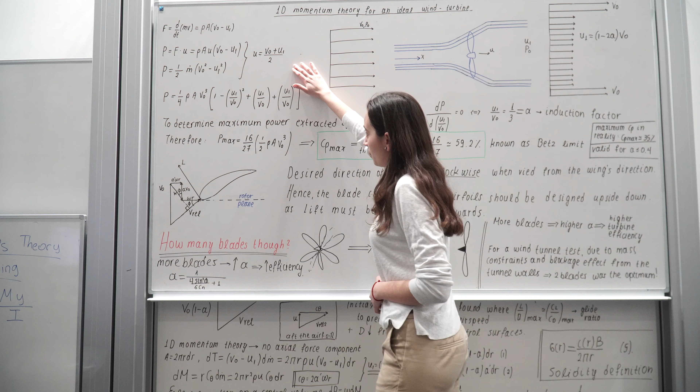A wind turbine extracts mechanical energy from the kinetic energy of the wind. This disc, which represents a wind turbine, generates lift and also slows down the wind due to the pressure drop behind it. If we consider the momentum balance and these equations, combining these two, we get average velocity, and hence substituting back in, we get the power.

When we differentiate this equation, we get that the velocity ratio behind relative to the velocity ratio in the front is equal to 1/3, and if we substitute that in the power equations, we get that the maximum power coefficient that we can generate is equal to 59.2%, which is known as the Betz limit.

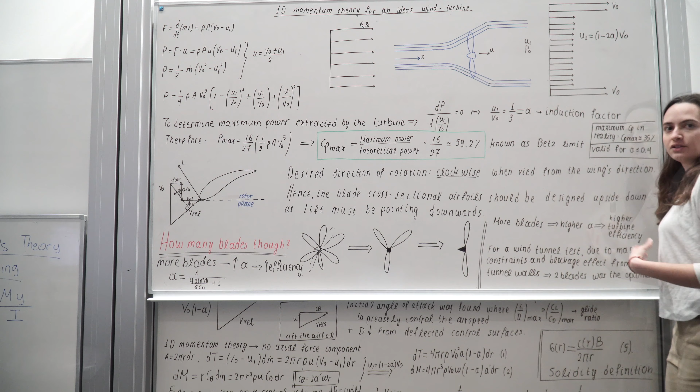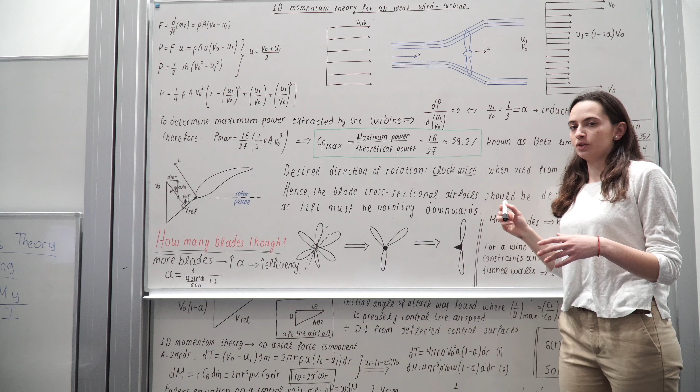But in reality, due to wake losses and friction, there can't be more than 35% of CP max. These equations are valid if the induction factor is less than 0.4, but we considered and fixed that when the case was more than 0.4.

In a normal airfoil, the lift is generated upwards. If the airfoil was kept like that, the wind turbine would rotate anti-clockwise instead of clockwise. Hence, we had to reverse that upside down to determine the spinning direction we would like.

More wind turbine blades give maximum power and efficiency. However, many blades closely spaced may introduce turbulent regions of air and mixing when rotating at high speeds. After a three-bladed design, the efficiency doesn't increase that much. For our application, due to the mass constraint and to minimize the blockage effect, we decided to go for a two-bladed design. So the chord and pitch angles were calculated using the Schmid distribution.

As you can see here, the relative velocity changes as the radius of the blade changes and is maximum near the tip. Thus, we had to introduce a twist angle, except for the pitch angle that's already introduced.

So the Prandtl's tip loss factor corrects our calculations for the wake turbulence that is being generated behind the wind turbine. So we added also this in our blade element momentum theory code, and we also introduced the Glauert corrections, which concerns an induction factor larger than 0.4.

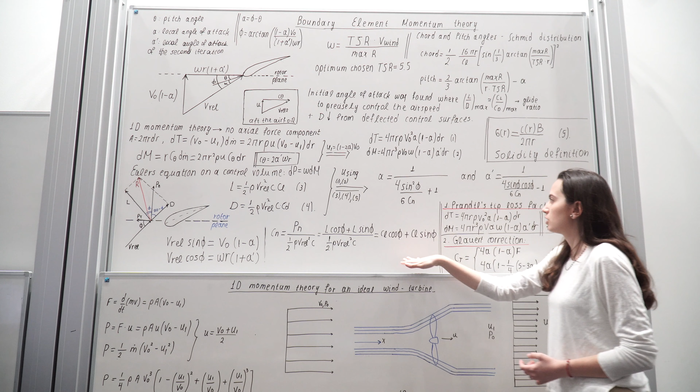And using these and the definition of lift and drag, we concluded on the axial induction factors.

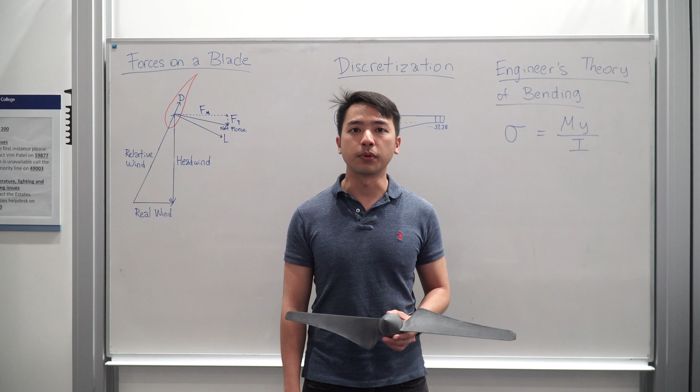Now that we have optimized the blade aerodynamically, we need to make sure that structurally it is able to withstand the loads that the blade will experience during testing. The two main loads we are concerned with are aerodynamic loads, which will cause the blade to bend in this direction, as well as centrifugal forces.

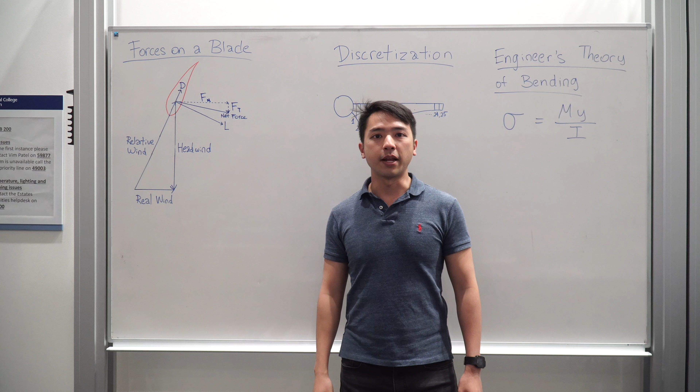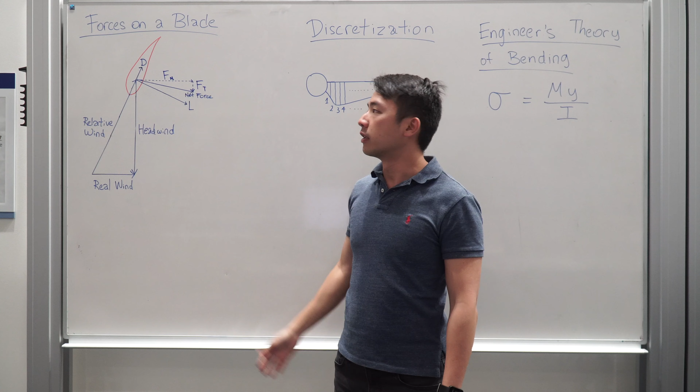As the blade spins, the forces act radially. First, we look at aerodynamic forces. From this diagram, we can see that the resultant force acting on the blade can be decomposed into a tangential force as well as a normal force. The tangential force is what causes the blade to spin, and what we are concerned with is the normal force, which causes bending stresses.

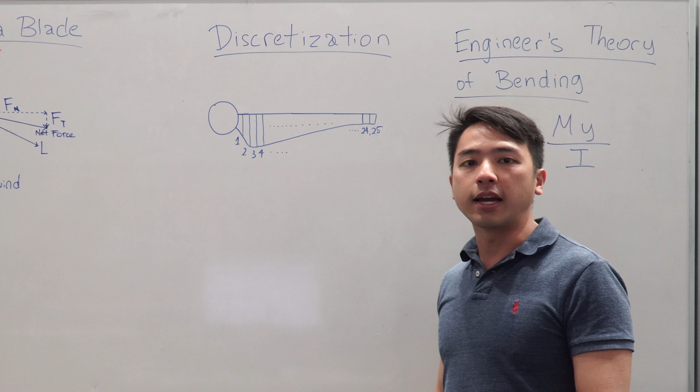To calculate these stresses, we simplify the problem by dividing the blade into 25 discretized sections, and assume that aerodynamic forces are discrete loads at each section. The second force we look at is centrifugal force. Again, we simplify the problem by discretizing the blade into 25 sections. The centrifugal force on each section is labelled dFc and is calculated with this formula.

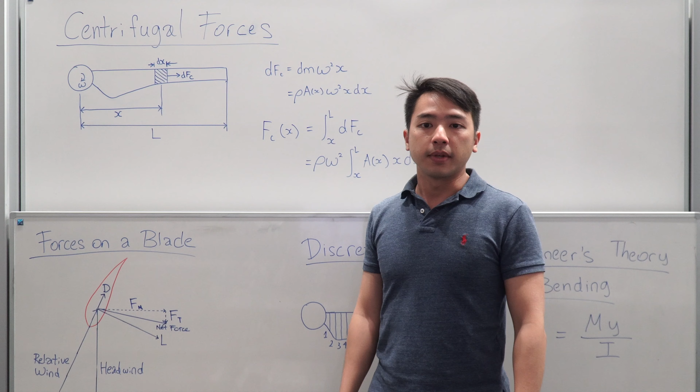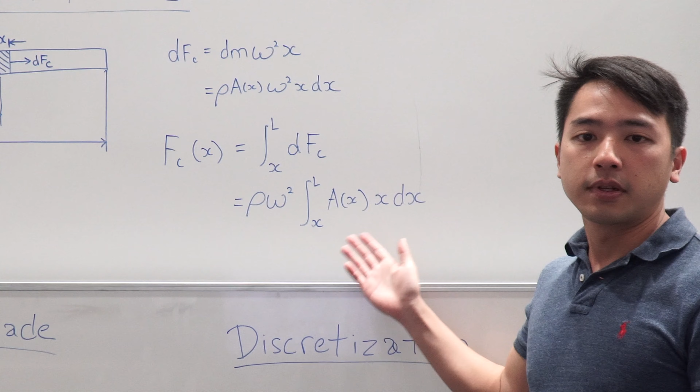To obtain the total centrifugal force acting on each section, we perform this integration. This force is then divided by the cross-sectional area to obtain the stress acting at each section. MATLAB was used to calculate and plot the resulting stress distribution across the entire blade, as shown.

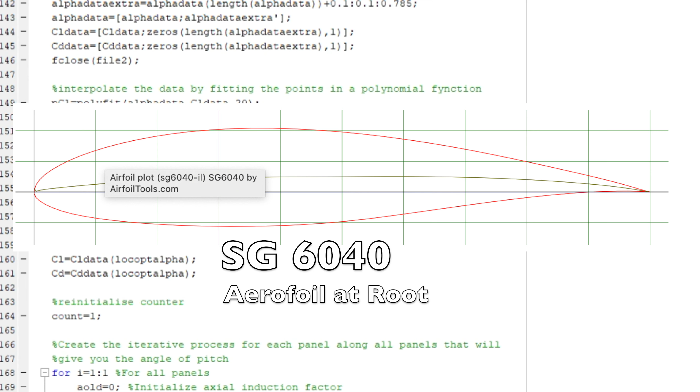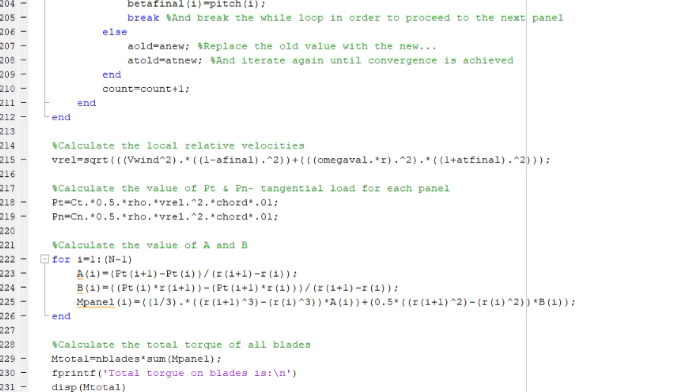Notice that the stress is significantly higher at the root due to a reduction in cross-sectional area as the blade tapers down to be integrated to the hub. This is also why we chose SG6040, a thicker aerofoil, to be the aerofoil at the root, because it gives a larger cross-sectional area to reduce the stresses experienced. The sum of stresses from both sources resulted in a maximum stress occurring in the root, which is less than 60% of the critical stress and was thus assessed to be structurally sound.

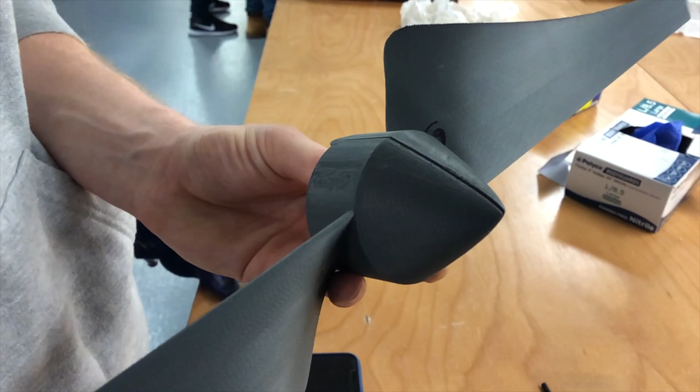Among the requirements, the CAD model had to fit in a small box corresponding to the 3D printer capabilities. This was a great challenge considering the longer the blades are, the better the performance is. Therefore, we decided to design what could be called a foldable wind turbine using a hinge mechanism.

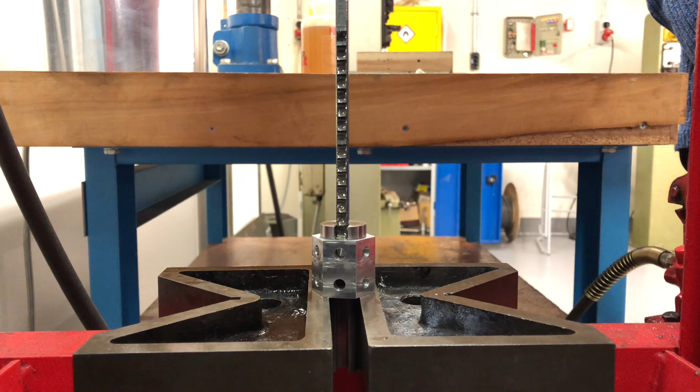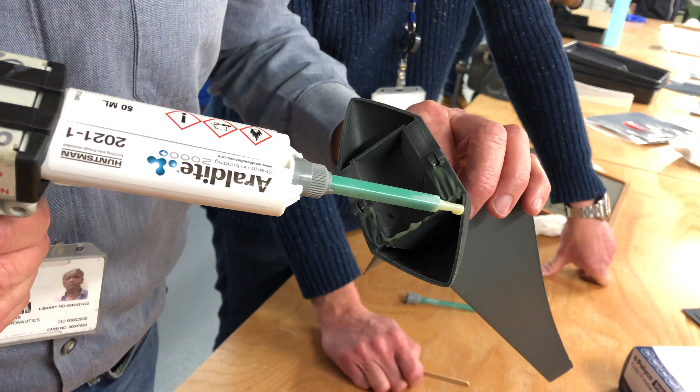The hub plays a central role. It is divided into two parts, each one supporting one blade. The hinge has strategically been installed at the back. This presents the advantage of not disturbing the aerodynamics. A small amount of space was left in all three dimensions to ensure that both parts can fully move without being fully independent. This is called an offset hinge, and it is only after printing it that the blades have been assembled using glue.

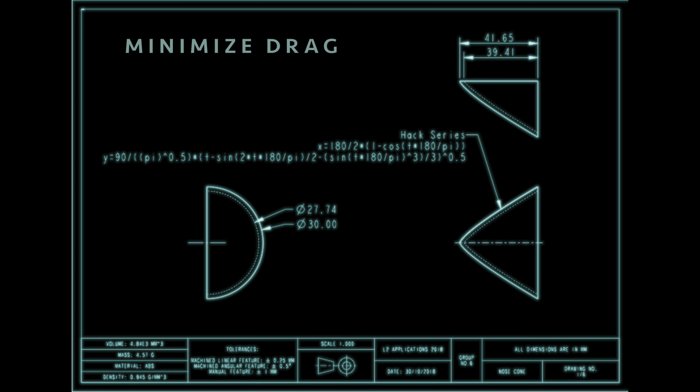Our nose cone was designed using the Haack series. The main consideration was to have minimal resistance to the wind flow, as the nose cone itself does not generate any power. To stay in line with the mass and structural requirements, we used the Von Karman series, which is a Haack series modification for minimum drag for given length and radius, which gave us the following nose cone curve.

The top half of the nose cone was hollowed to a thickness of 2 mm to save weight, while the bottom, where the wing attachments were, was kept solid to maintain structural integrity.

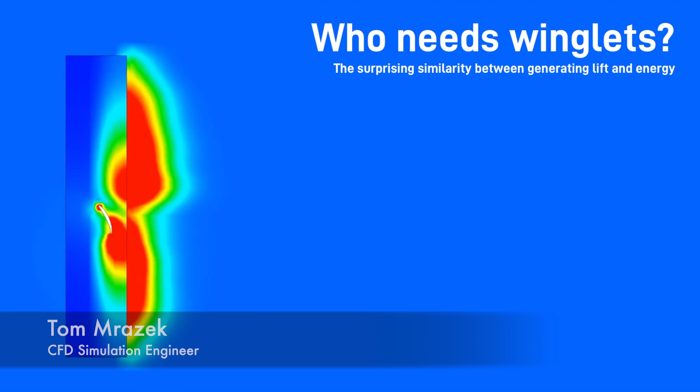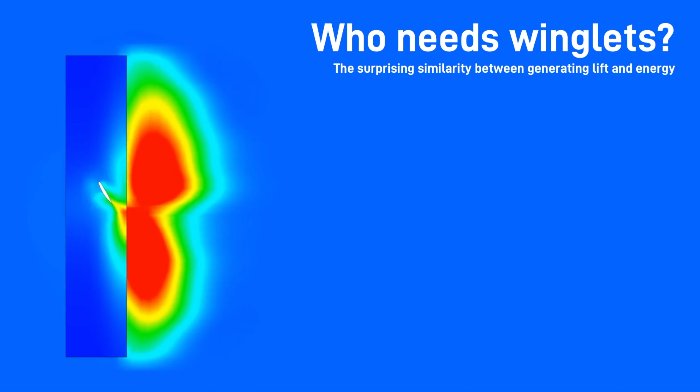The race for wind turbine efficiency brings about more elaborate and streamlined shapes almost every day. Designers take their cues from nature, imitating evolution in designs such as the blended wingtip. But to blindly copy from nature without understanding context isn't enough, which is why our team decided the best decision is that which has the data to back it up.

We used the flow simulation toolbox in SOLIDWORKS to do just that, and to decide if the blended wingtip, a concept just as popular in modern aircraft as predatory birds, would work in our particular case.

Here is a comparison of the two models, one with the bio-inspired feature and one without. It is clear the winglets not only reduce wake behind the blade, resulting in cleaner airflow, but also reduce the pressure differential at the tip and therefore drag.

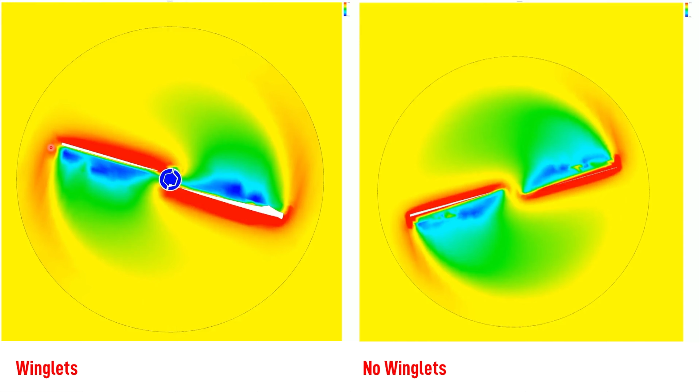Finally, a cut plot of vorticity shows us the winglet-equipped blade generates far fewer wingtip vortices, allowing it to extract more energy from the oncoming airflow. We made cut plots of both averaging and local rotating regions to confirm these findings.

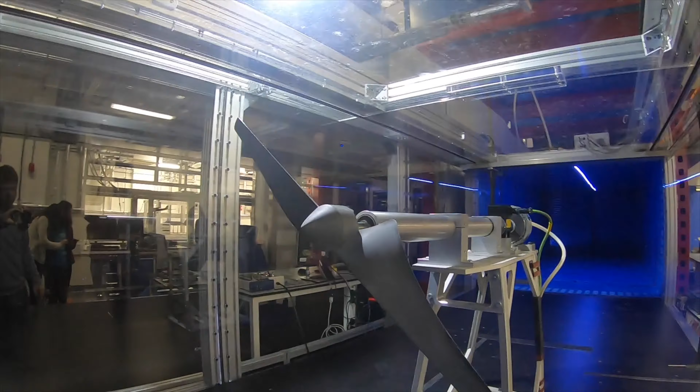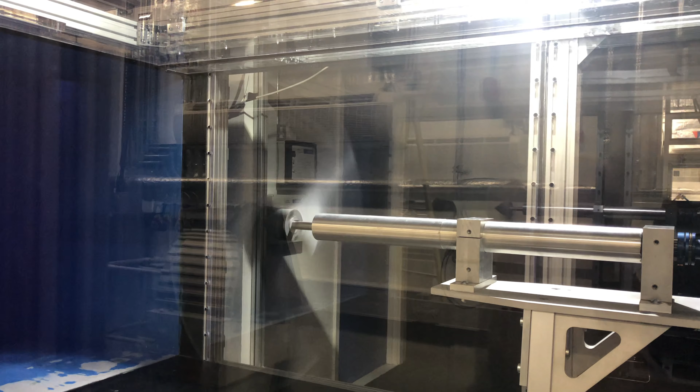We compared our design values to the experimental data we obtained through wind tunnel tests to validate our design calculations. As expected, the maximum power is generated at 12 meters per second and has a value of 61.6 watts. Beyond the wind speed at maximum power is the stall region with tip speed ratio lower than the optimal one, hence there is no more power increase.

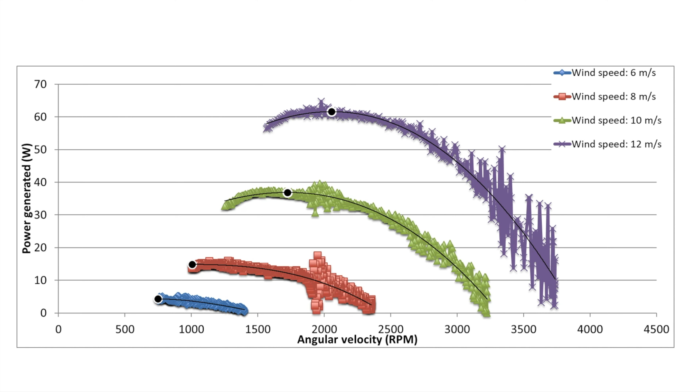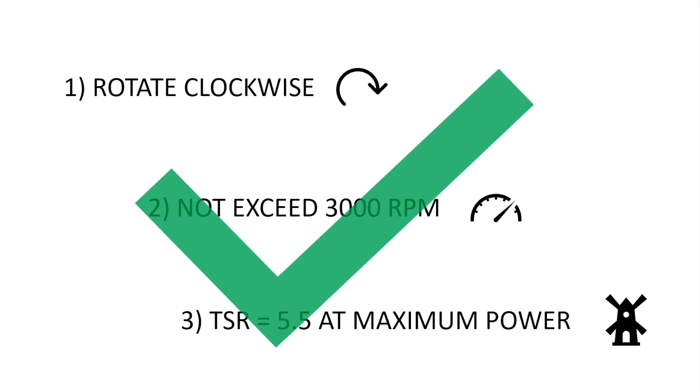The experimental TSR strays from the design value by 10%, which is small enough to be accounted for by the blockage effect. The correspondence of the design and test data validates our aerodynamic design method and corrections used. The fact that our wind turbine had negligible deflections and didn't undergo any failure attests to our structural design methods.

During our design, we avoided taking unnecessary risks and focused on preventing failure. Because of that, we would be more confident in a phase 2 of our design, where it would have been beneficial to test the effect of the wingtips on the overall performance. Apart from that, our project was a great success.